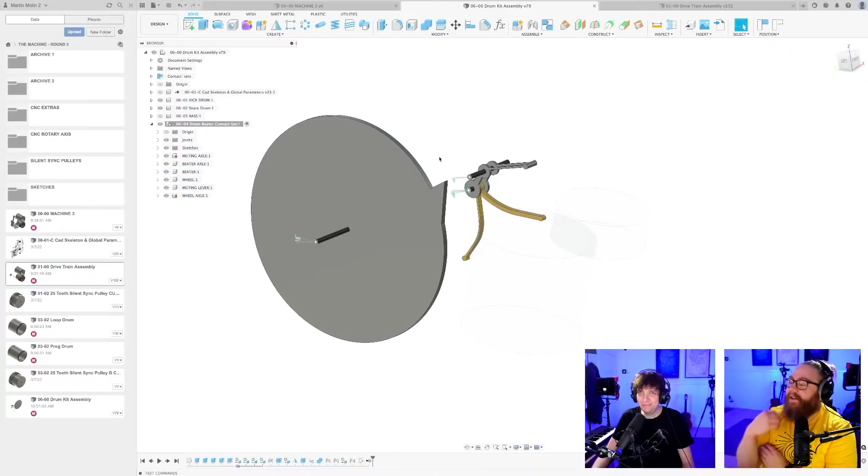Every day is like a dream here. Thank you for joining in, keeping us company. Today I have to teach myself something before I can move on.

So yesterday I started to figure out, basically the project right now is about getting a feeling of where we have space to put different things. One of the best breakthroughs we had yesterday is that I learned I can put this muting mechanism here on the crankshaft, because I thought the crankshaft would be in the way for this mechanism. Then I realized we can hide it in plain sight. We can use the thing that was in the way.

And then I started to make a motion link project here. I'm going to revert this position to show you, to calculate the muting mechanism of this movement. You can see how it reacts to the programming wheel here. But I quickly ran into the limits of my knowledge.

So I have to teach myself about motion links. I want to create a spring-like motion, and that's what I need to do first. I think it will be a useful tool for me during the rest of the design process. Like yesterday, I described it as physics simulation with low resolution. I think this could be very helpful.

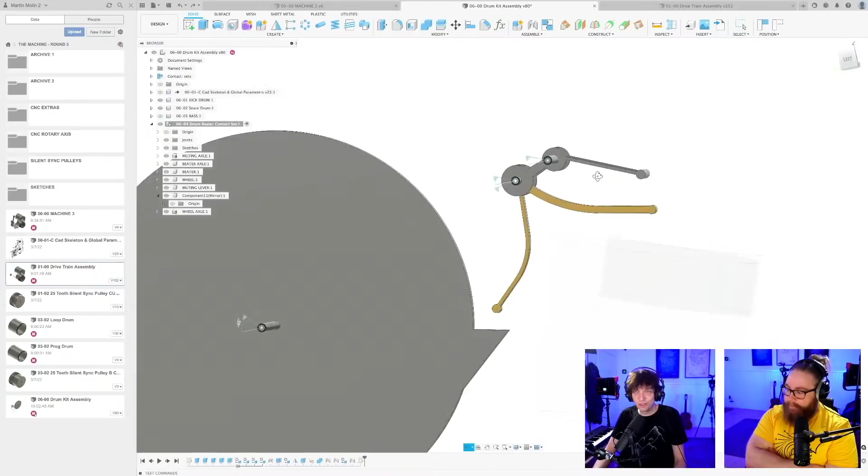So basically, sit back and relax while I'm painstakingly learning about slider joints, because this is what I've been researching. I need to make a spring-like movement, because once we do this thing here, I want the drum beater to return. So when the triangle skips here, it's going to be spring-loaded, and I want it to return like this. And then to complicate matters, this is the muting mechanism, and I want to see if I can also activate that. So that's on the agenda for today, and happy to have company while going on this adventure.

Well, you guys heard it. Fasten your seatbelts, it's gonna be a wild ride today. Here we go. Spring is coming. Honestly, this is going to be the motion.

Okay, so a little bit of backstory. On the second Marble machine we built, I forbid any link joints in Fusion 360, because at the time, the models we created had joints crashing the program all the time and messing everything up. So I forbid the joints, which means during all my years working with this program, I've never really learned the joint thing.

The joints seem to be working now, so I'm really behind in knowledge on this. So first thing I'm going to do is create a new component, and it's going to be some kind of sliding joint. I want to learn how this works.

So this is just to learn. Let's make a sketch on the middle of the drum plate.

Drum plane, I mean. And as usual, we have people coming in from all around the world. We even have Lee Bennett, aloha from Hawaii. Oh wow, and good morning from Kungsbacka. Nice, Australia, England, Carter Frost, greetings from New Mexico. Woo, 2 a.m., is the night squad out now? Fantastic, and here Rorschach gets what I'm talking about. Good morning, CAD watchers, let's get it on!

Yeah, it's funny because I feel not only a touch, but quite a lot of apprehension to learn about motion links. I don't know what it is, it's like some feeling I want things to stay where I put them. I don't want them to move around in CAD. Stay put, don't move.

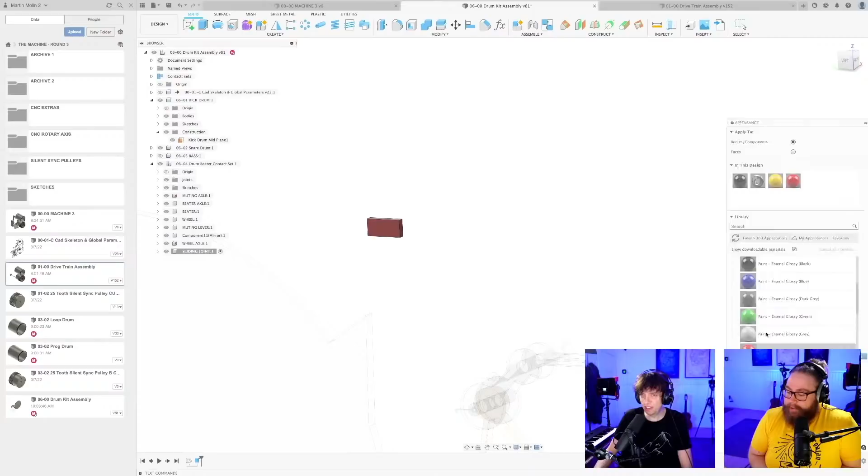So first of all, I need to make sure if... So I'm going to use paint to make things obvious. I'm gonna see if a sliding joint needs to be between two components. I guess so. Component 1 and component 2. Yeah okay, I can't even make the joint without a second component, so there we go. First lesson learned.

Already, so sliding joint still. This is gonna be the base of the spring that does not move. And then we are going to... I'm gonna copy this component, paste new. Or maybe let's just try to make a copy.

So as I said, I have no clue about how these joints are actually working. So now we have two components, they're a copy of each other. Let's try to make a sliding joint between these. This one. Oh, this is completely wrong. Motion link, can I make a motion link right away?

Is it an as-built joint then? So you see, I really have to take this from... So now I make an as-built joint between these two.

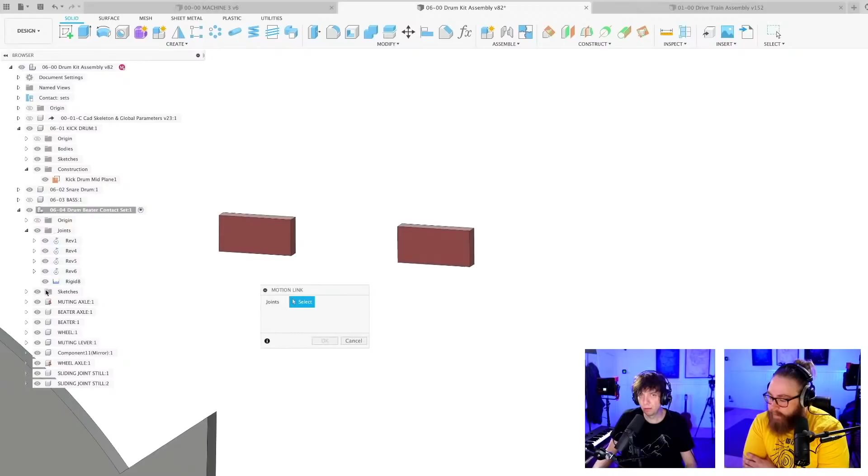Elliot is typing a lot of stuff here. So let's see, yes, motion is always between two components. And then the first one you select will be the moving component relative to the second one. Ah, nice, thank you. Is it Newsex? Thank you, Newsex.

Let me first of all not work with copies, because that can... Let me do what I thought first, paste a new component. So this is deleted, says here also. Quick tip, I find as-built joint works a lot better than regular joint command.

It lets you position everything in its default position with sketches and planes. Good idea.

Moving. So, this is already... let me change... So let me revert this position of this one, but let me do, I think, almost... This is the default position with the sketch.

Okay, this is better. Now we have green there and red there. So let me... I still don't think we can make a... Okay, I have to choose a joint.

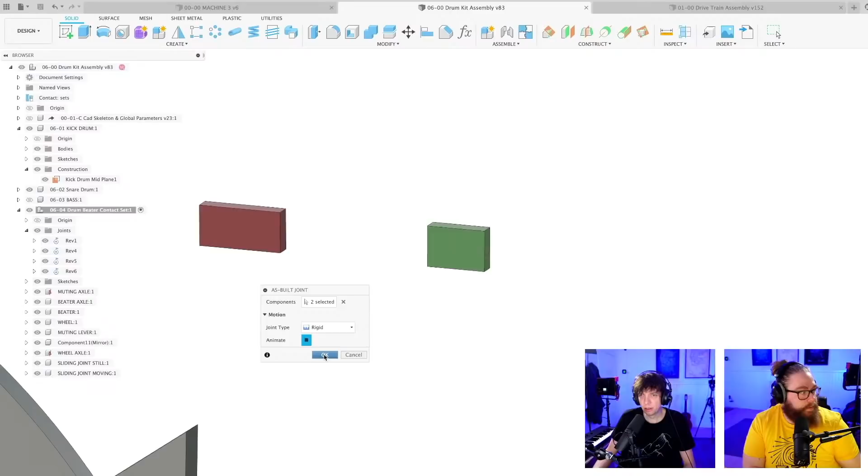Okay, so we have the as-built joint. Can we now edit this joint? Joint type: slider.

Okay, mode between two faces, simple, two edge intersection. Creates a joint origin. Creates a joint origin on a face. Okay, simple. Slider. And what's this?

Snap. Ah, select. Good. Here we go. Here we go, everybody. This was the missing link.

I have to do something like this. Ah, look at this. Oh wow. Yeah, we have movement, everyone.

You're animating pretty good on your own, Martin, huh? Maybe. So, and what I learned today is that

on this sliding joint, you have this little edit joint limits button here. Sneaky button. That it's a real sneaky one.

And I want to make a rest position, because I want it to return to the rest position. So let's just put something, 30.

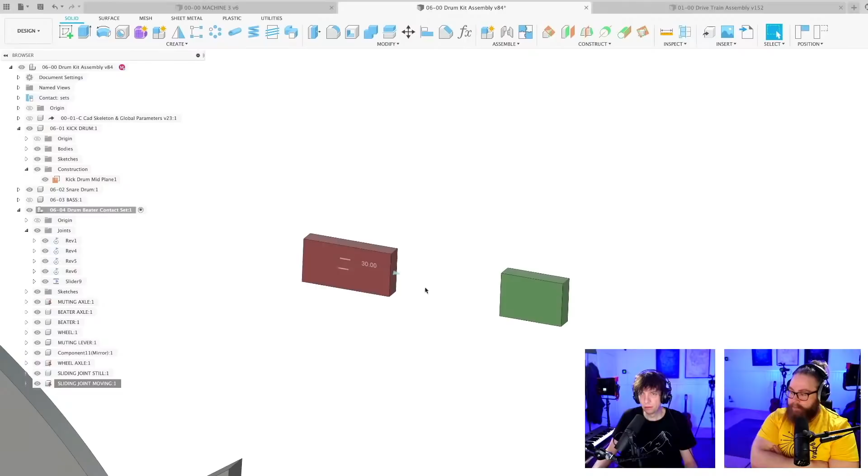Okay, good. Wow, look, wow. So I'm pushing this, it's almost like magnets. Woo! So this one I revert.

So now my idea is to use this red block as a kind of a spring to pull back this yellow beater.

Because it's going to revert. It's not a spring, it's just like a default position. Okay, progress. Progress, absolutely. A little bit of progress anyway.

You know what? Let's do this. Elliot keeps writing here: as-built means that the objects had to be in position where they already interact.

So if you want them to slide on each other touching, you have to move or create them in that position. If they're not touching or in a position where they should belong, then you shouldn't use as-built joints.

Okay, that's good information.

The master sketch. I think I have sketches turned off. No, I don't.

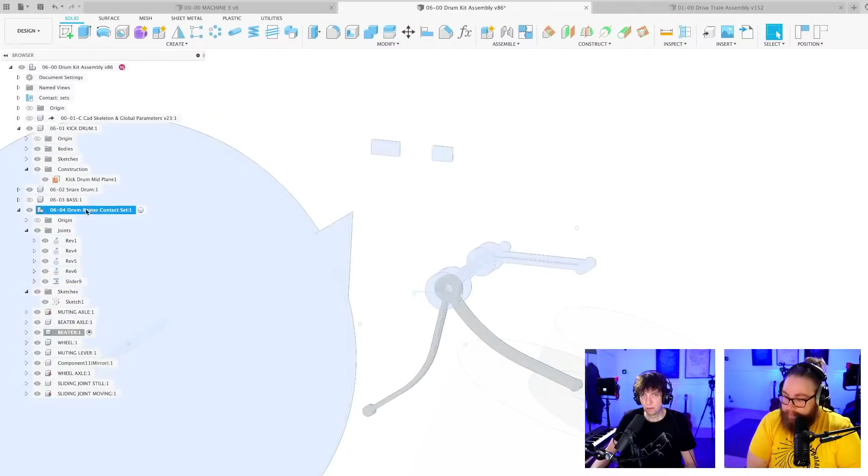Let me add. I'm gonna put a spring up here just for ease, like this. Finish sketch, and let me find the extrusion command of my yellow beater.

I was thinking actually this morning about prototyping things like this, and that we're going to learn physics simulation and everything. It's going to be fun, but it's going to be very limited.

And I think I realized that probably we could prototype with 3D printing at small scale. I think that's pretty interesting. So you can maybe just print this mechanism like 5 times smaller, and you would have actually a really good idea. I think that would be super fun.

That's kind of what Rosero taught me. Like 3D printing is fantastic for prototyping.

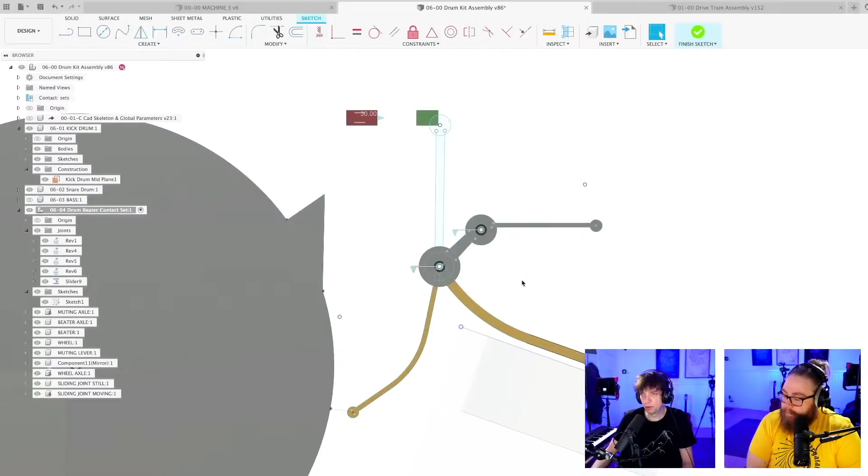Etalon3141: stupid question, I take it you cannot add a default position to the lever arm itself? Ooh, you're thinking maybe because this has a motion joint.

So maybe we can... let's look. I think we looked for it yesterday and didn't see it. Like a resting position to this joint. To the arm, no. But to the joint that is driving the arm.

Let's see in the browser tree if there is. What is this? Edit joint limits. Okay, oh wow, here we go.

Wow, Gretzky in the chat. Gretzky's, they're already here. They were here before we even started the stream. So that's how much they know where the puck is going.

Okay, and what's interesting is next time when we... okay, let's put a rest here.

Maybe it's already solved. So this is why I love streaming, because the Gretzkys in the chat are on the ball. On the puck, you mean?

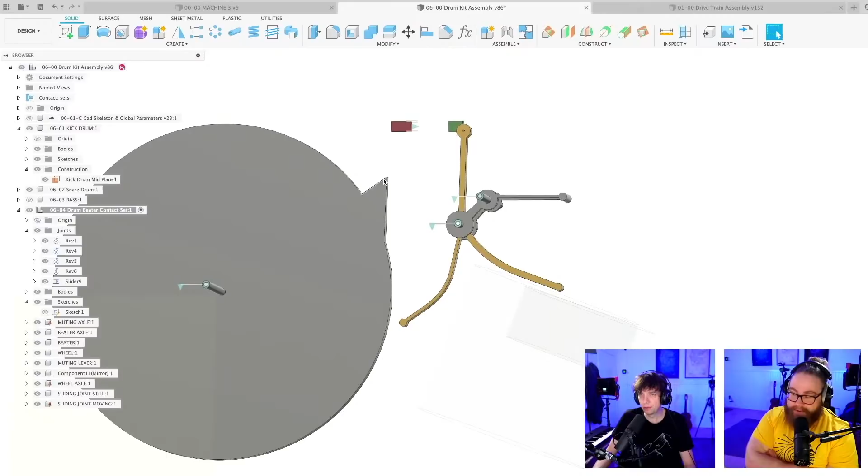Yeah, why can't I move this now? This died yesterday as well. Why does it do that?

Renan Kiritani: What would Rosero do? Cool way of thinking, haha.

So this joint broke yesterday again. It's super annoying. This is not the wheel. Sorry, I have to fix this.

First of all, let me just do -10.

Okay, children, close your eyes. Oh, they're closed. There's something else here. What is this? There's 2 bodies here. Okay, we have to find what is happening here.

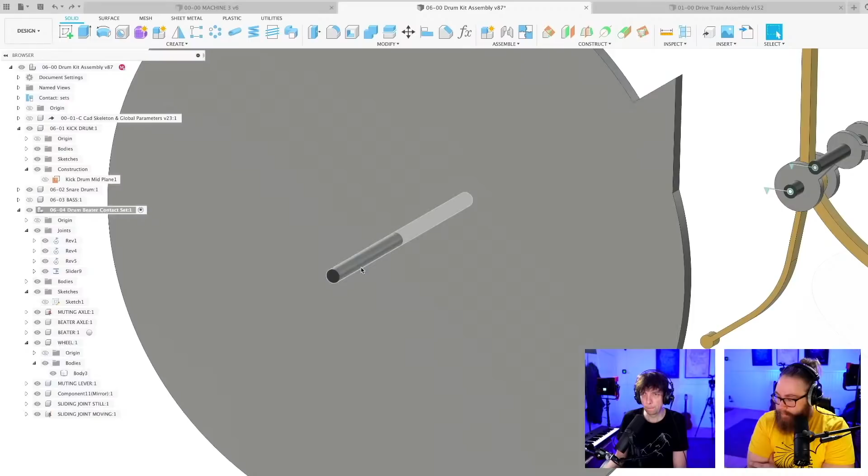Okay, something has been wrong with this little axle since the beginning. So let's roll back the timeline and see what is happening. So here's a body. That's good. And here's another body. All good so far. And then something is happening around here.

So let's name this wheel axle. I just have to make sure that all components are what I want them to be. Let's create a component from this body.

Oh wow, Samuel Westergren just joined in here. Hello from Marble Machine 1 photographer Samuel. Hallå Samuel, vad trevligt. Samuel took the best images.

Oh wait, I can show it actually. So Samuel, forever grateful to Samuel's amazing wepix.se, that's the website. He did all the promo photos and everything for the first Marble Machine in Gothenburg. Yeah, check this out, this photograph to the left here is Samuel's photograph. Brilliant man, I've been using that image almost as much as Solstickan cover art on the Swedish matches, which is the world's most replicated artwork.

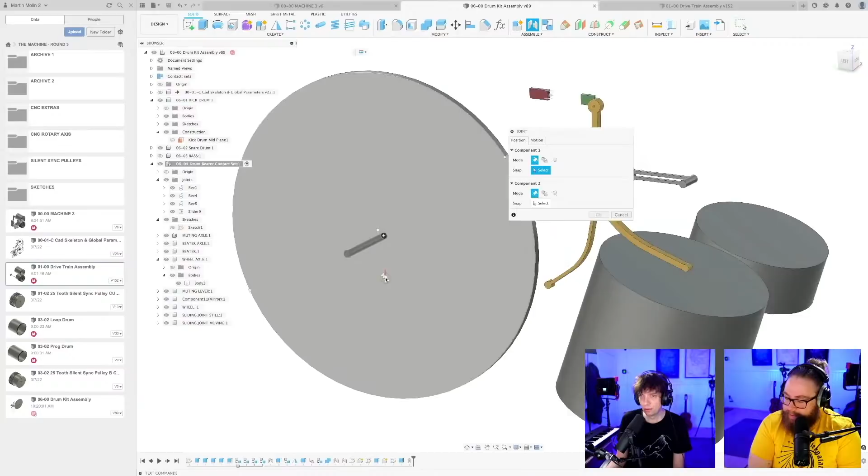That's what we're trying to do. Okay, so that's good. So let's now fix this joint between this thing and that thing. And I'm just going to slide it over into the middle. There, it's touching, and it's going to be a revolute joint. We see the animation, that's good. Oh yeah, and this thing should be grounded, just like Butters.

Thank you. Oh wow, thank you, Hannes. Wow, 3000, this early in the day. Yeah, wow, we have to compensate for me having to learn here. Okay, we're back.

Now we can see if the Gretzky in the chat. Okay, yeah, it's not part of the contact set yet. So let's just edit the contact set up here. That's the little thing that decides which components bump into each other. Edit this one. And as you can see, we have only 2 selected, and I have to select the wheel as well.

Now when I rotate the wheel, it will push the drumstick. And we have made a resting position. So let's see. Oh, yes. No, did not return.

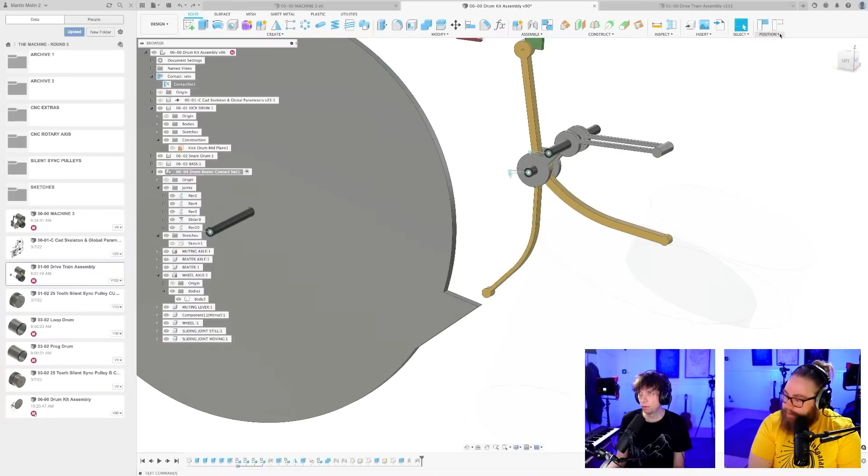So let's see what happened there. Oh, maybe we made a resting position on this. No. Revert.

Okay, so let's check again, because there's 2 joints here. It's between the gray and the black, and between the yellow and the black. So this one doesn't have a resting position now. Let's add one there.

And let's see now, it's 2 joints, so maybe we did it wrong. Oh! Whoa! Yeah! Whoa! Yahoo! No, there it's... what's happening now then? Almost, I celebrated too early. Sorry everyone, like a biker who lets go of his bike before.

Okay, what? What? When you release it, it snaps back. Ah. Okay. Well, that's success, I'll take it.

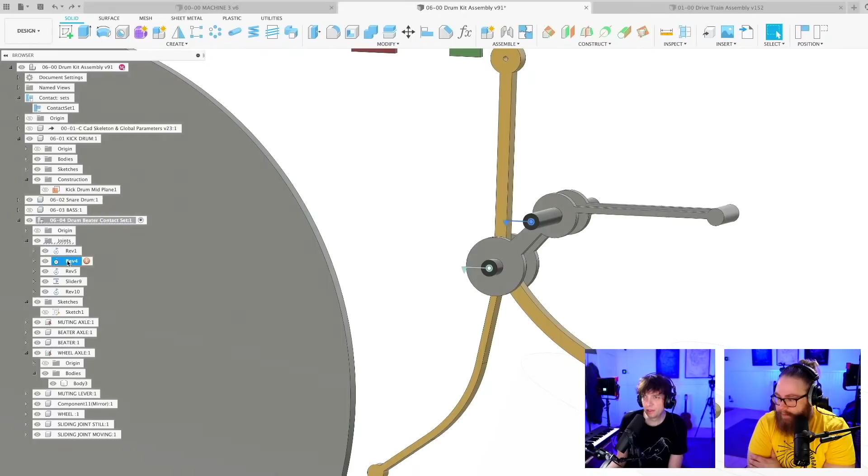Now I'm very curious. When we do this, okay, so I'm going to do the same thing on this joint. What was the name of the person who said there's a default position on the beater, Gretzky? Oh wow, I will scroll up and see if I can find it, who you are, I will find you. Edit joint limits, Italon 3141.

Yeah, thank you Italon for pointing out the correct route for me here. Look, now I have a resting position also on the muting. It snaps back.

But this, when we're doing this, can you see that the yellow thing is not angling? Yeah, and that's not how the function is supposed to work. Revert and save. Oh, we gotta save, everyone.

Can I get a cheers also? Oh yes, cheers Martin, cheers. Cheers everyone out there, cheers to chat. I'm trying to not drink in the microphone. Well.

So I'm gonna make a little stopper here that should push the yellow along. So let's go into this component.

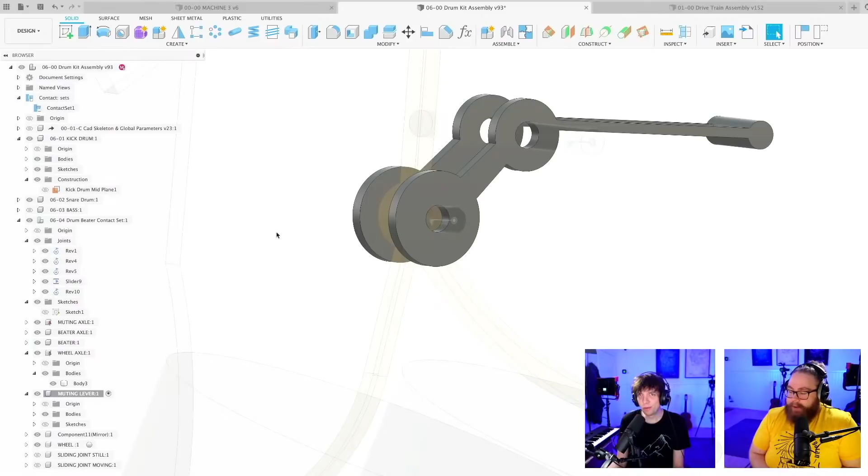So how are you, Samuel? Or if you're still here, let us know what's happening. Yes, give us updates, Samuel. Woo!

Italon says, makes me proud, thanks. Ah, that's nice.

Kooky Crumbs says cheers. That's our old friend Kooky, right? That's on Discord, another Avenger hero returning for the endgame. Yeah, he's here being a moderator. Actually, we've had wonderful moderators on all our streams so far, so we want to thank the moderator team a lot. So thanks Kooky for being part of the team. Cheer brilliance, our moderator team. Yep.

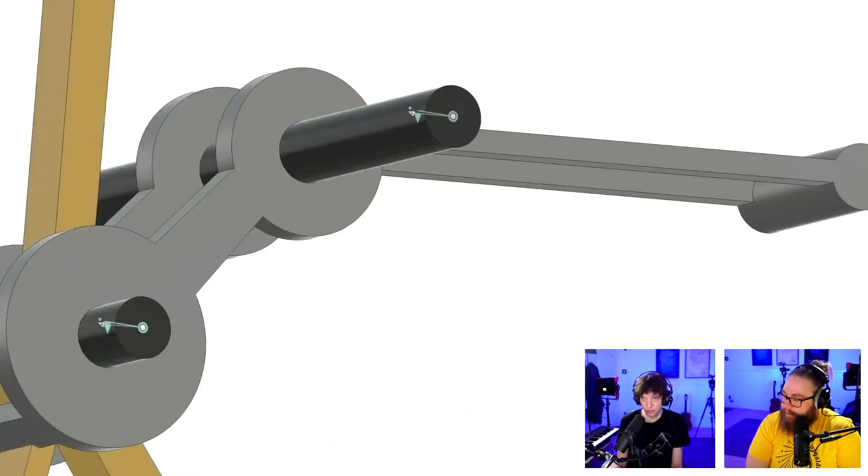So I'm doing a little stopper thing. And these are probably not part of the contact set. No, they're not. So what I mean is you can see this gray part sliding into the yellow body. You see how that cuts into the body? There? Yeah. Oh, I increased my zoom factor.

Oh, it's enhance, nice right? Enhance. So we have to tell our contact set to also include this and this. Oh, this was already included. So now when I rotate, the yellow should be angled. Okay, and now we're of course stuck forever then.

Well, to ease your pain, here's an update from Samuel Westergren. He says, I'm fine, will be a dad any day now. Whoa, congrats Samuel, congratulations. That sounds amazing. Yeah.

I know parents don't want advice, and you won't get anything from me because my own experience is with Wilson, and I don't know how applicable that is. But if you find similarities between Wilson, just give me a call. Yeah.

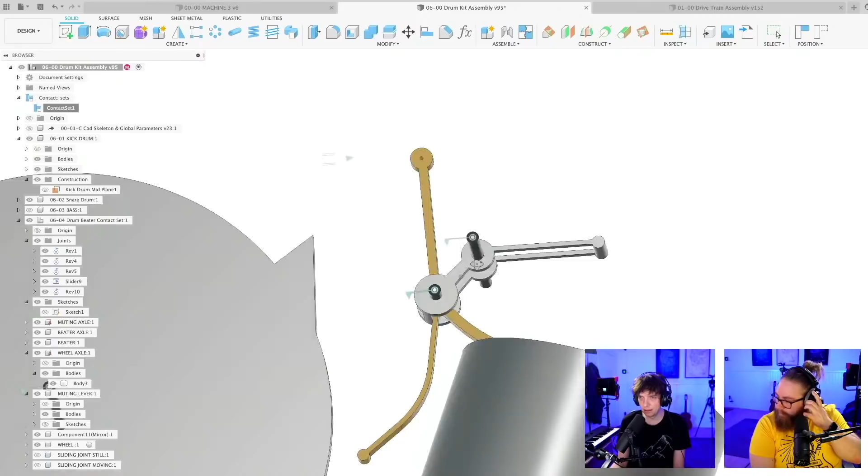Okay, we have some struggle here. It is working the way I want it to work, but in the beginning there's some kind of conflict here. So I have to exaggerate what I want it to do.

This is a little why I had apprehension for this project, because I'm suspecting that what I want Fusion to do might be impossible, but it also might just be because of what has happened here now. Why is this going straight through here? Have you moved anything? Revert position.

Wait, is this one grounded? No, that's not grounded. When I move, can we ground this one? This one is grounded. So when I move this upwards, I just want this to happen.

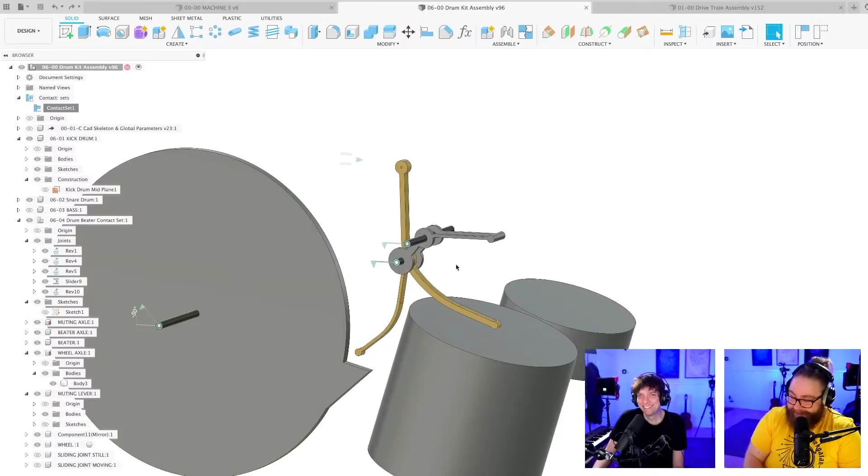Yes, I think Fusion gets confused when I have two shafts. Inuyasha says, Martin, it conflicts with the drum underneath. Yeah, but not here, the push lever will crash into the drum. Yeah, but here in the beginning, I only want a couple of degrees of movement.

Let me try to move it with a move command instead. I'm going to do movement like this, then Fusion knows exactly what I am trying to do. And see, it doesn't want to. And here all of a sudden it starts to accept it. Look. Yeah.

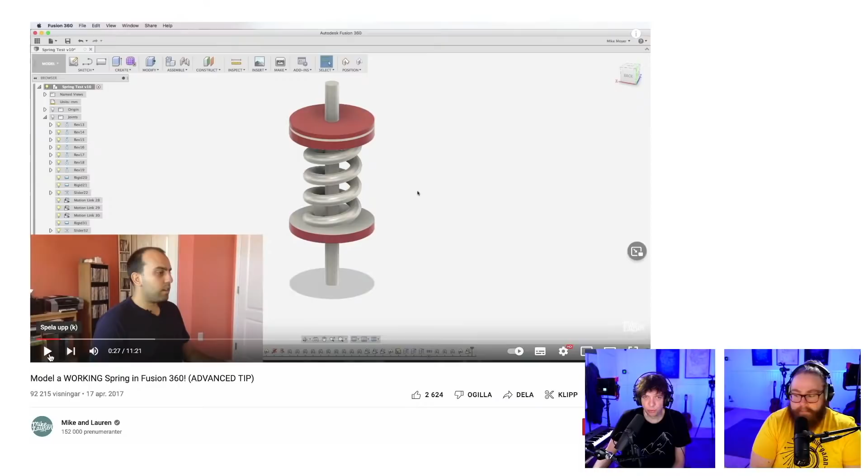Yeah, I wanted to show you something cool. When I was researching this, I found from Mike and Lauren, they modeled a working spring. Take this, on our screen you can see I've made this little spring that not only acts like a spring, but it also springs back on its own. And my reason for making this is I'm trying to... yeah, I just want to show you that, that's possible. Fusion doesn't have a feature like that.

And I also find John Hackney, this is for some reason off. There is John Hackney. Oh, John Hackney, he's helped us before. Yeah, I found John Hackney's tutorials very useful. Test a motion link instead of driving ratio. So that's also something I've been researching, and there's a lot of tutorials on this that has been great.

I have three different things from chat here, so let's see. Constant Zion: it's pushing against the wheel, but not against the notch. And then we have Graham Evans: check your motion limits. And Janik W: maybe you could add the kick drum to the contact set.

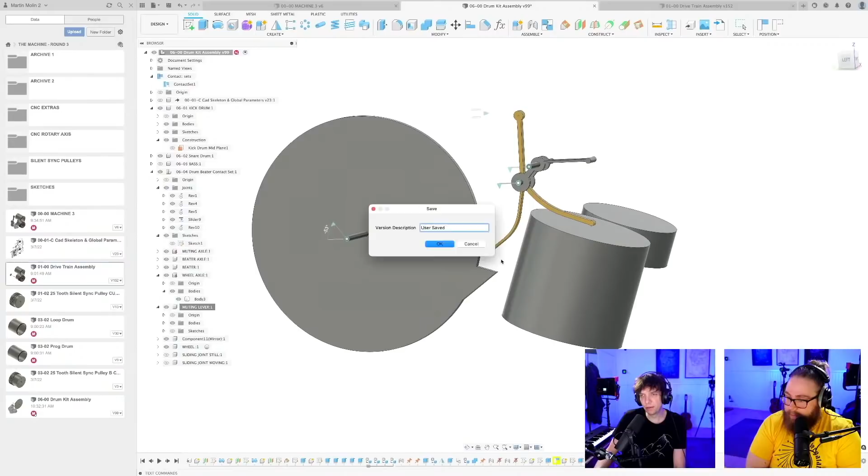Yeah, so my issue is starting before here. Oh wait, what I can do... I could actually do two... I can show one thing... Okay, now I have an idea. I can duplicate all this, and I can have one thing that shows this, and I can have the other one showing that. That's actually a pretty neat workaround. So let's just duplicate all these parts, except the axles, I guess.

Oh, it's only three parts. Dee, dee, dee, dee, dee. What's happening?

Here we go. Put them in front. And on this secondary thing, I can show the muting mechanism. That's actually everything I need to be able to design this, so I guess that will suffice.

Gyro Cabello, to me the problem seems more a lack of limiting the maximum degrees of freedom of the joint to avoid undesirable movements, isn't it?

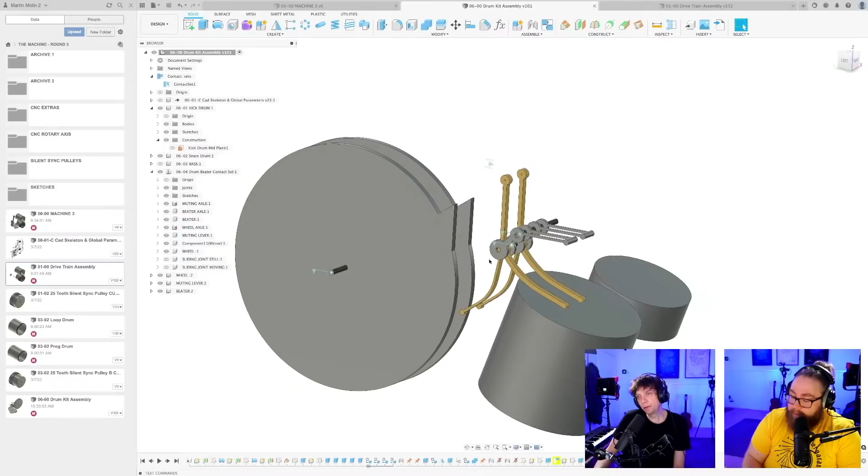Well, Fusion doesn't let me move it at all. So I think it is this stopper that I want free movement. Yeah, I'm not sure. I'm not sure. So let's now make a rigid joint or an as-built joint between this.

Wait. I think that with the current settings, the drum is still a ghost that doesn't influence anything. So now these two are moving in unison, which is what I want them to do.

But we're going to make another joint between this and the shaft. And it chooses revolute by default, which is good. And now it behaves the way I want it to. So you see the difference now is that the yellow thing is angling.

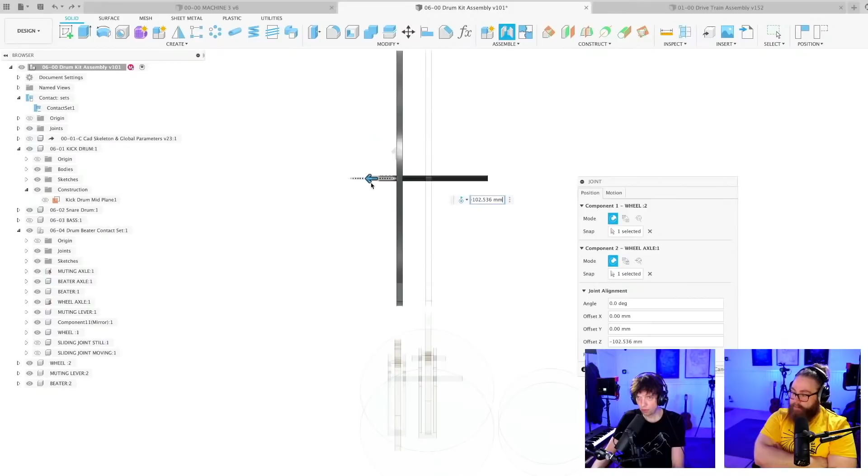It's following the motion. And the point of that is that when we put it like this, now the drum is... 1 second. This second wheel has to be jointed to the shaft. So as a tool for making the design, this workaround is good enough.

Oh, I should have set resting position on the muting. Revert position. So I think it's this joint. You can also name the joints. I should have done that.

So on this new joint, I'm going to set a resting position right here, which means that when I mute and let go, it snaps back. And then I realized that maybe I don't want that because I want to measure. Yeah, so I'm actually going to remove that.

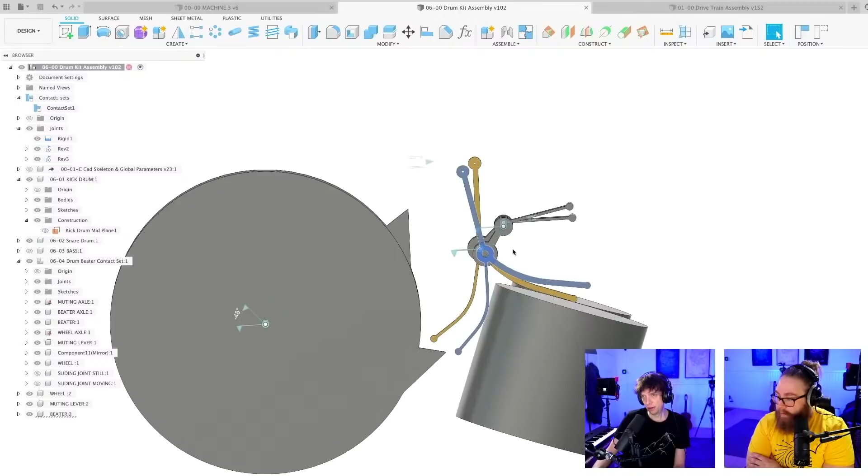And I am a little bit nervous about this space. You can see we're going into the kick drum here. That's not really optimal.

Revert position. Yeah, I'm actually happy because what I think, to put this in the same thing, I do not know if Fusion would accept that. So to explain the issue exactly what I want to do, maybe someone can replicate it. I want to be able to move this freely, but this should not be able to rotate backwards against this circle. So when I move this, this thing should always go forward like it does. But then if this still could pivot freely on this circle, that would be the whole thing.

But let's not cross the river to fetch water. Let's just keep on designing with this tool right here.

Hi, Martin and Hannes from Melbourne, Australia. I love the new CAD-only approach. The streams are so fun. So happy you have moved to version 3 and left the MMX behind, as great as it is. Thanks for the music. Oh, thank you so much.

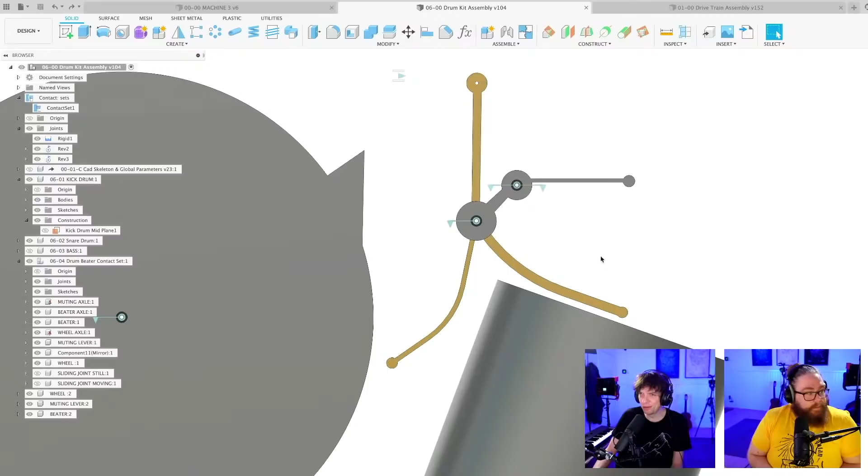I think the process for this project is 100 times better than anything we've done before. I totally agree with you. It's very nice to hear. And I hope to show everyone in the end, if we have like a functioning Marble Machine 3 in a year from now, people will like, oh, it was pretty smart moving to CAD only. That's really, the thirst for revenge is burning in my mouth. You can taste it.

To underscore this point that just was made from chat, we have some footage from the first building of the first machine. And yeah, you can kind of see how that process, it was suboptimal. You lose. Yeah, I prefer this type of work much better. Or as we also usually say, my machine will work. Speaking the truth. Okay, let's get down to it.

I'm worried about the space between this kick drum and this wheel. As you can see... Duker says, wouldn't a Revolute joint with limits do what you want? No, this is what we have. It is what we have.

Oh wait, it's actually... it's not what we have. Now I open my small ears. I used this. Okay.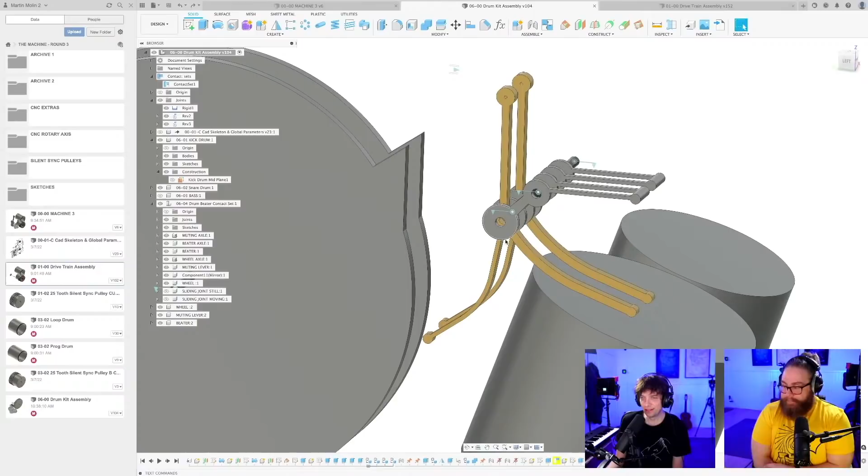Martin, you have to listen before you speak. Let's try. Oh yeah, it can. Okay, now we'll see. We have one more thing to try.

So I made this stop, but it's a physical stop, and that's maybe confusing Fusion. So let's delete this feature. So now we don't have that stop anymore. But it's not following.

So if we go to... I'm just going to check what we did with the spring here. We have a resting position there, yes. But if we go to this joint, now I'm with you. This might work, it also might not work.

Let's try. Minimum and maximum, of course. This is of course... maybe Fusion has thought about this. Who knows? So this is the minimum, and the maximum is 20.

Oh, I'm in the wrong joint. Let's cancel this. There are 2 joints here. Which one is the other one then?

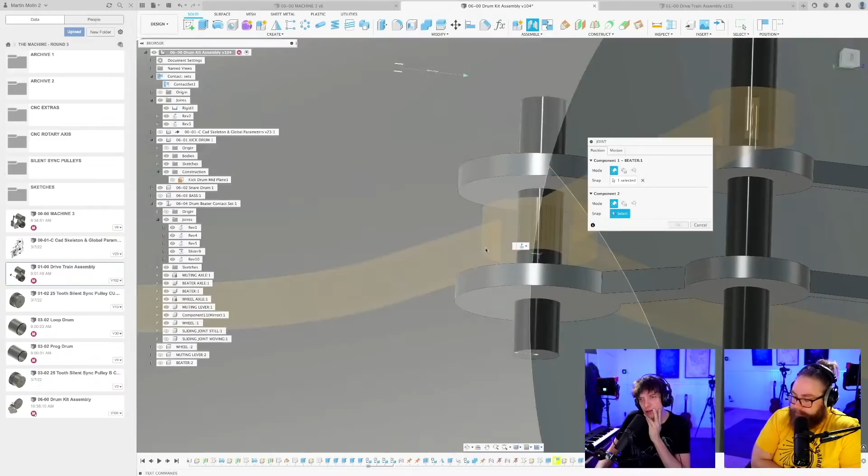The following assembly relationships already exist. Rev 1. Where is Rev 1 then? Is it this one? There's actually 2 flags here. Is this the one?

Let's just enter something here. Okay, here we go. And we have a minimum now. Okay.

No, the yellow thing is not rotating when I rotate this. It's just staying in its resting position. So it's not.

So maybe if we skip the rest, let's try. No, that's wrong. Let's try to skip the resting position

and see now. We can also animate. That's actually smart, let's animate this. Okay, so this is perfect. Now we have joint limits.

But it's not rotating when I do this handle. This contact set broken? Never mind for now.

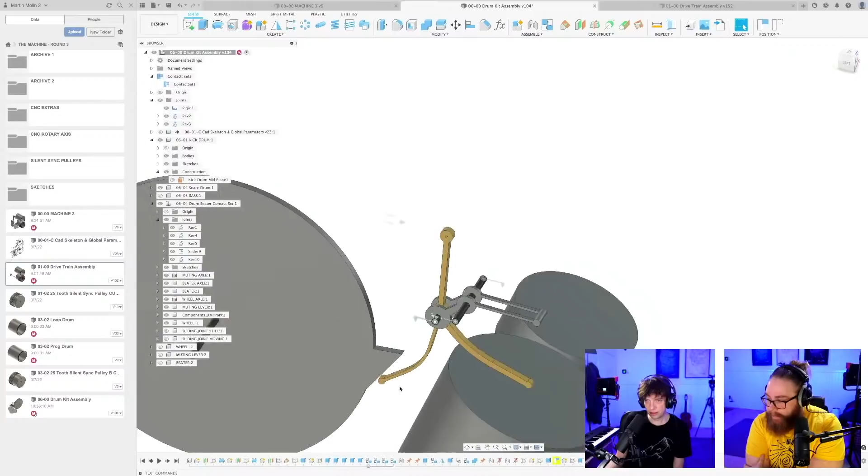So the question is how to tell the yellow thing that it should actually be rigid with you. And I thought my workaround with a stop there, with a positive stop.

Let's try that one more time now when we have the joint limits.

So I'm just going to project this and this. I'm just going to make a little thing here, like a little thing, a small thingy thing. Yeah, and then this works.

Okay wait, so this works better now when we don't have the rest. But where is the rest position on this? Okay, interesting. Let's now try the... maybe we're getting somewhere here. Maybe...

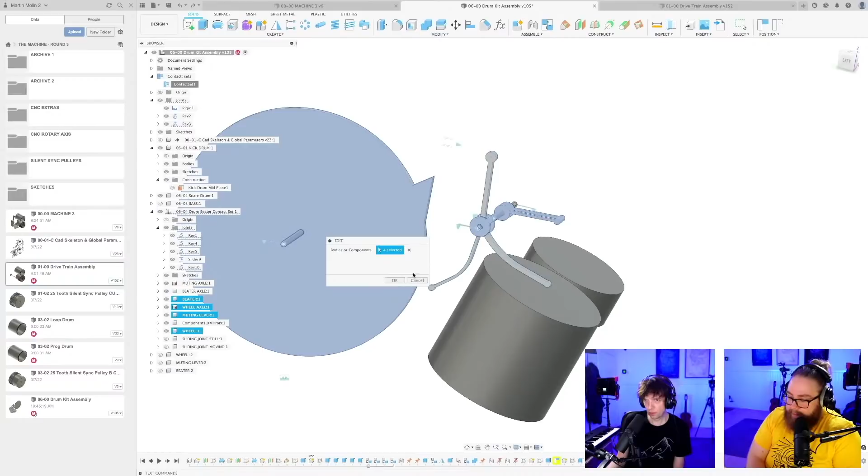Okay, a lot of tips from chat. Rob Brennan Craddock, let's see what he says. No, he removed it. This.

See, now it's not. Oh wait, of course not, because it's...

Okay, Jerome Verbong: the axle is rotating in both parts. That means the minimum and maximum angle will start to spin the axle inside the gray part.

Yeah, that's why I want to use this stop. And right now it's just going through because it's not part of the contact set. That's a good point, the minimum is spinning, and that's what I was hoping for. So this works now, now the stop is taking it.

Let's put a resting position on this one. Why isn't it actually already a resting position?

Linus Albertsson: maybe the mechanical stop confuses Fusion when you CAD it in contact. You mean it should be like a small little digital gap?

RST Trigger 003: create a joint between the yellow thing and the gray one directly, without including the shaft.

That's interesting. And Rob Brennan Craddock: isn't that behavior expected? You're telling the beater to rotate without friction around the lower pivot point, so that when you move the lever, the lack of friction prevents the beater moving.

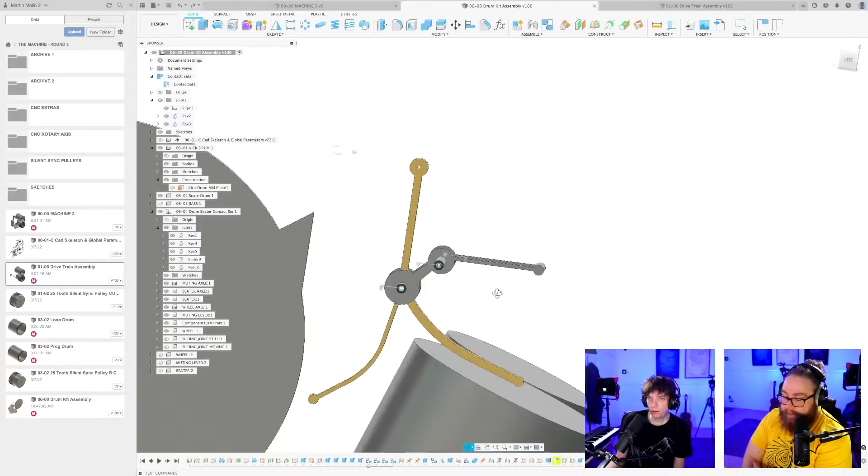Yeah, but we want to simulate. So what's not here is there's two springs connected to the cage. So this is a cage. Maybe sometimes I forget what I'm not explaining.

There's two springs. The yellow thing is connected to the gray thing with two springs on each side. And I should maybe mark them. But first of all, we're very close here, but this one is not returning. And I don't understand why. So I just want to find out why.

What's this joint? Edit joint. Between muting lever and muting axle. Okay, this is this joint.

So why edit joint limits? Why is the resting position not?

Rest 2 degrees, rest 0 degrees. Why is the resting position all of a sudden just not working anymore?

I'm going to delete this joint. Then this should be no. Okay, so that was another joint. So what's this joint then?

Confusion 360. Confusion 360.

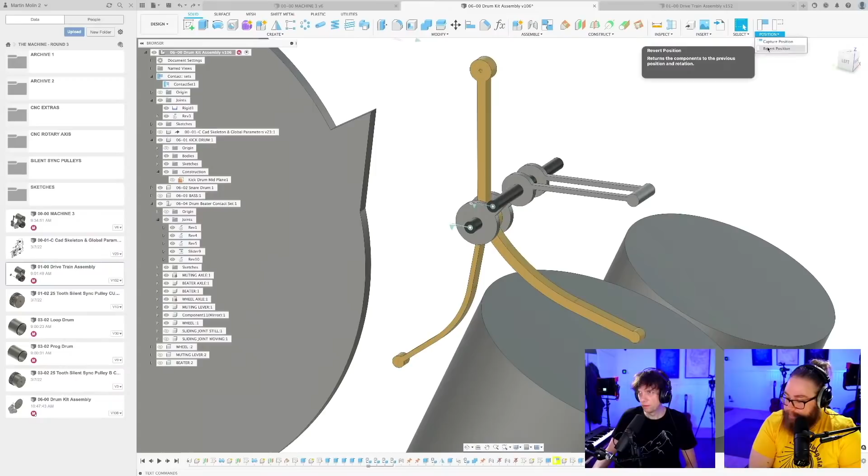Oh, is it because... Okay, so it's definitely this joint. And all of a sudden, it just ignores this. Why? That it takes that one.

Can the resting position of the beater be set relative to the muting lever instead of absolutely? Let me figure out why. I'm going to delete this joint as well. So now, the resting position... delete, and make a new joint between you and you.

Okay good, and I should also name my joints, because that's been a downfall so far. So this is my new beautiful joint. I'm going to call it muting lever to pivot. Never mind the spelling.

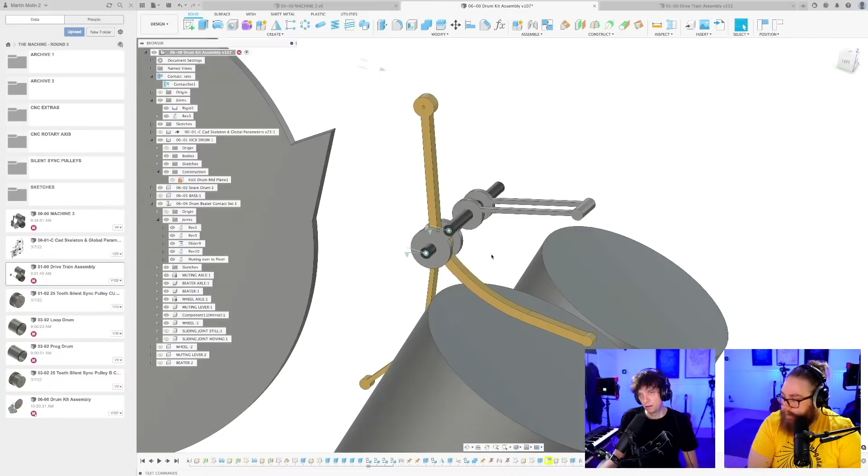And if we edit this joint's limits, we should be able to get it to move like this. Zero degrees, okay. I don't understand, it says some kind of override here.

Yeah, I don't think this is a productive rabbit hole. It feels like there's some kind of override happening. We're so close.

Why are things moving up here? What is this? I'm going to delete this sliding joint and delete these two components.

Graham Evans says conflicting resting positions, yeah something like that. RST trigger 003 - definitely you need two joints: one between the gray thing and the shaft, and the other between the gray and the yellow things. For the second one, you can set the resting position and limits.

Yeah, I need resting positions for both though. So let's delete all the joints, because it's a good idea to have it between the yellow and... I just want to create one joint with a resting position again that works.

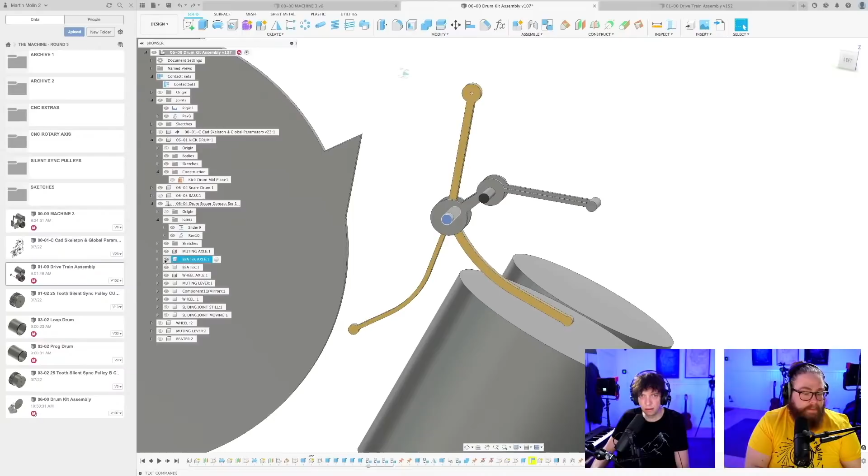So now there's no joints anywhere. You can see we can pull these things apart. Let's start from scratch. Maybe we should hide... you're pulling me apart, Lisa. So I remove that little axle.

Joint between you and you. So if nothing else, we will learn where joints are conflicting. Muting lever. Now I'm going to add a resting position to this joint.

Rest at zero degrees, okay. Now this should work. Okay good, look, now this resting position is working. That's what we want.

Now let's join the yellow thing to the gray thing. Perfect. Okay. And now we have the expected behavior that... oh, look at this, it's breaking the rest position. I haven't put a second rest position at all.

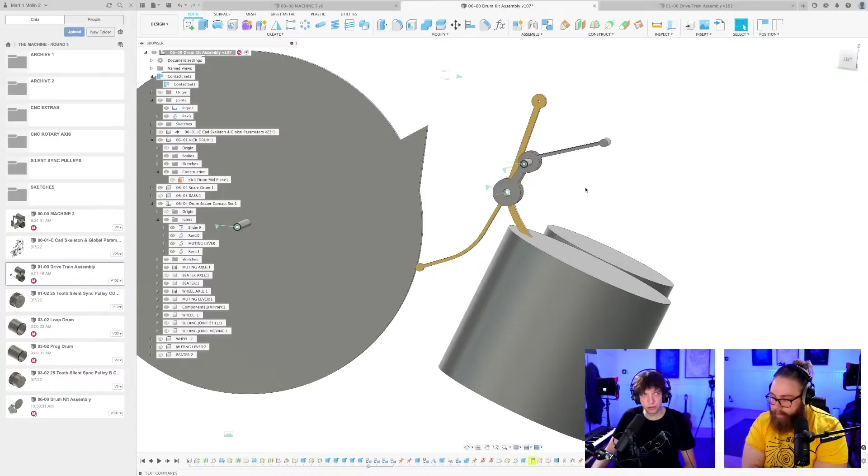Somewhere here I'm going to start to blame Fusion and not myself, actually. It's never your fault, it's always Fusion, you know. Because it just doesn't understand our brilliant ideas. Honestly, it doesn't understand me.

It sucks. Yeah, so this is the point where this is not a productive rabbit hole anymore, but it was super fun to learn more about it. To make design decisions, I don't need to bump up against inexplicable behavior of these resting positions. I'm not interested in going further with it right now, because we don't have to cross the bridge to get some water.

But it's annoying as hell. Well, I can tell. I'm suffering with all the people in chat who wanted to see this work, and definitely need to understand more about relationships - when you start a movement and you have several joints, how does Fusion prioritize this joint over the other?

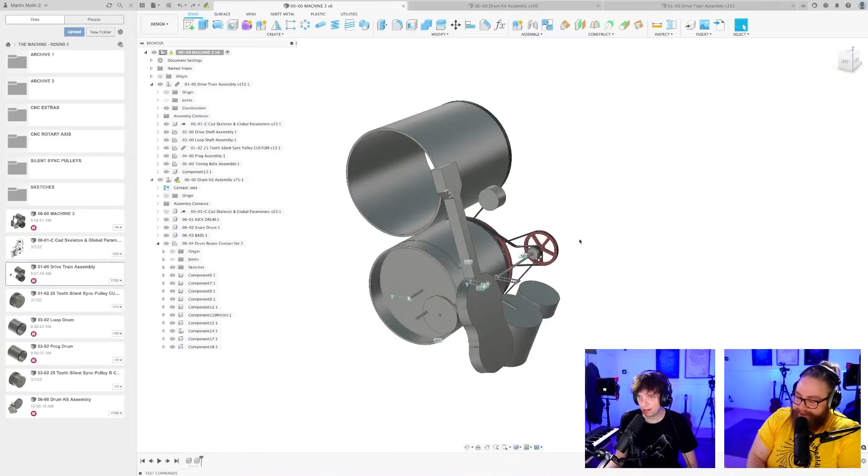So let's talk about design instead. Cookie Crumbs, going to leave that one to rest. Boom!

That's brilliant. Elliot says that's why it's breaking, and collisions don't really work as they are one-time events and Fusion doesn't work with those. And he wrote earlier there - the rest position of your wooden lever is relative to the muting lever, not to the programming drum, I guess. That's why it's breaking.

It hurts. So this is why my idea from the beginning was to use this sliding thing. Why are you moving? Why are you moving now? I'm going to ground you like butters.

So my idea, check this out - if we use this, I'm bullied back down into the rabbit hole by myself, I can't stop it now. My idea is if we use this to revert the yellow thing, just like a spring, then I can also show my design better.

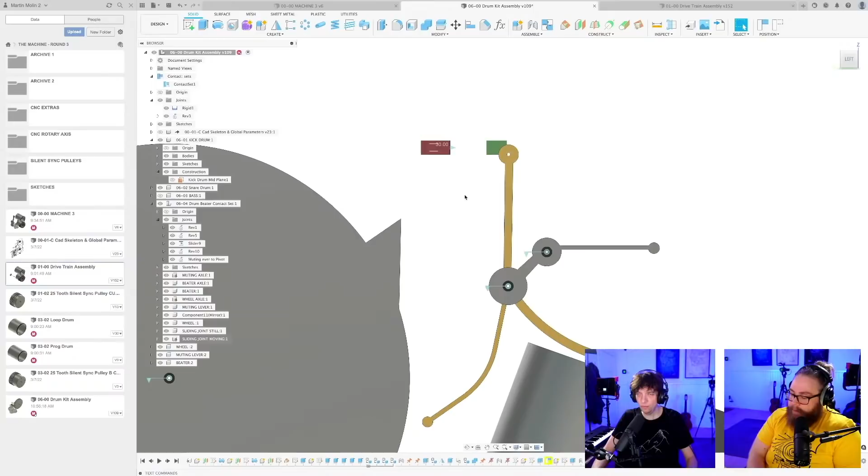And Elliot says here, one thing to keep in mind - if you're doing physics simulation afterwards, you do not need to put joints and motion links in Fusion, you'll do that in the sim software. Yeah, that's a good point. The reason I want to learn this now is to have this kind of lowest level simulation tool for designing, just to see how things kind of move.

Oh wow, rumors are spreading out here in chat now, Martin.

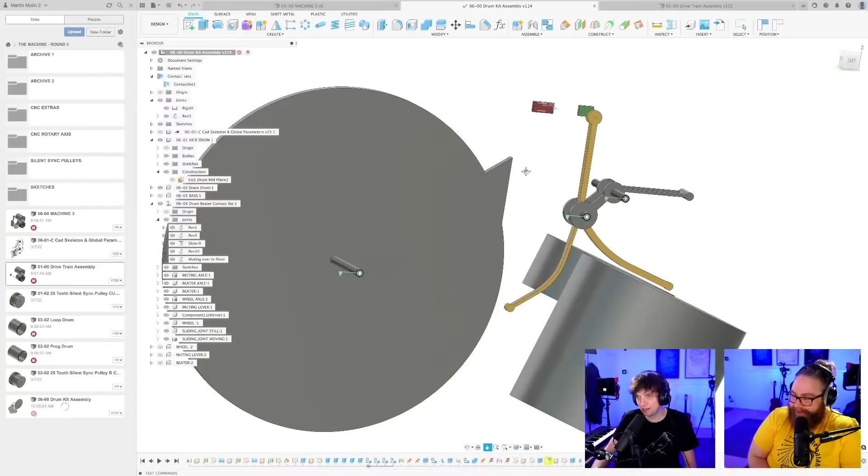So here's my thing. If we use this thing to revert the yellow thing, and if I rotate this thing with this thing, that's my little idea.

But I don't know if we should spend time on this. I do not know if we should spend time on this. I'm conflicted, as conflicted as the fusion joints.

It looked like you were getting into your rest position right there. You mean this?

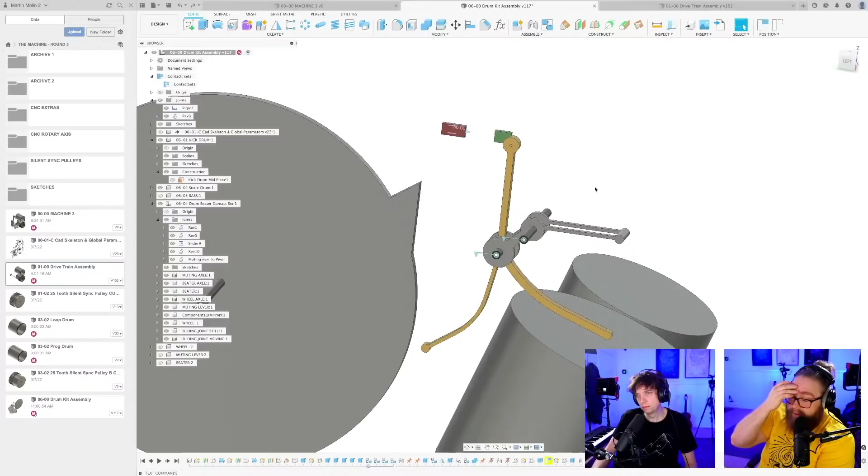Let's just see here. The muting part could be the separate part. That is putting the yellow's axle to the front and fixing it there. A spring will always try to put the yellow axle back.

The added value of me going a little bit deeper is that I can show everyone the mechanism I'm going for. So regardless if we can fix the movement, I think that in itself is worth it. So let's do that for that reason, if nothing else. That's actually a valid reason for digging a little bit deeper.

So what I'm cutting now is the two spring holders. Ugly, but that's okay.

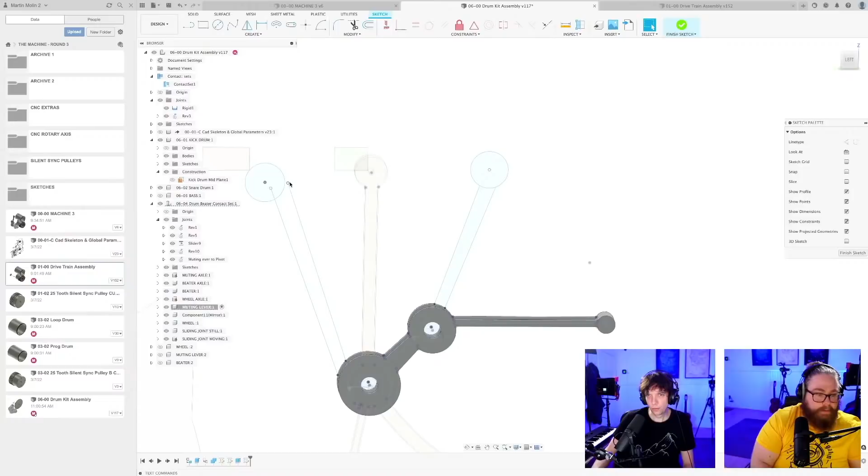Let's join this. Paul Wilkins, it's a good idea to leave it for now. Other people can explore this problem space and come back to you with solutions if they exist. Oh, that's a very, very good idea.

Then let me just finish this by making it clear how the springs will act. So here's our springs. Oh, I want it that way. I want it to go the other way. So let's see if I can do that.

Edit joint limits. Rest 600. Okay, nice.

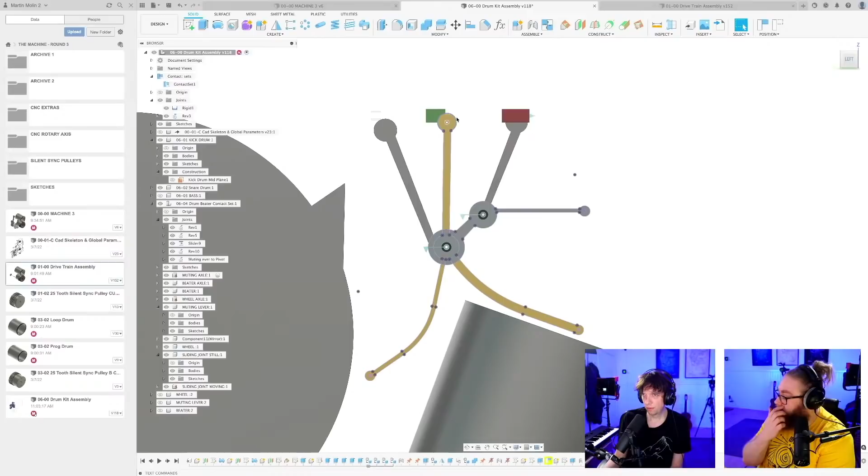So I'm gonna leave it here. For this to work, this would have to pull the yellow thing, but the red thing would also have to pivot with this.

So there has to be like a... Yeah, I'm leaving this now. I'm taking the shovel and filling up this rabbit hole right here. Good. Other people would... it would be great if you could figure it out. I hope...

You know what? Let's go to the iPad and I'll show you the design. Here we go. So if you want to CAD this, this is what it should be. So here's the programming thing, here's the registrator, and here's the pivot point of the muting thing.

I'm gonna make some better colors so it's easy to understand. So this is also from this. And then we have the spring holder here and a spring holder here, and then springs here. And if I fill the different parts so we can know what's what: yellow, yellow, yellow. Beautiful.

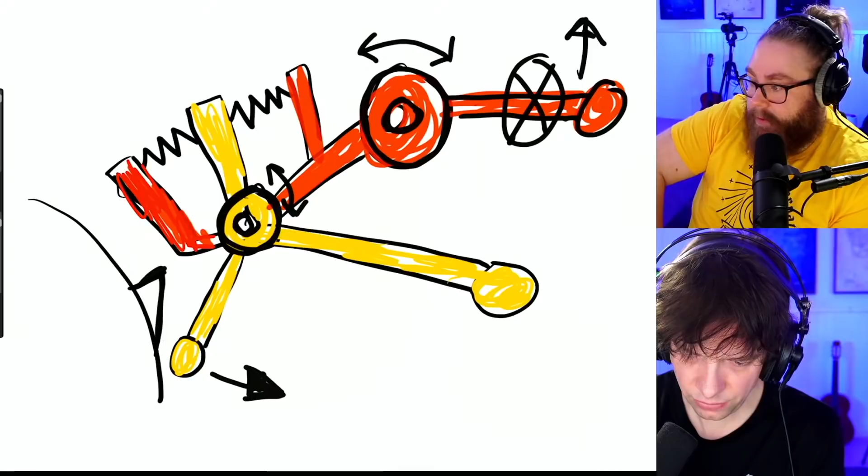This is moving like this, and this one is also moving like that, but the springs are obviously holding it. So when you secure this in place here, when you lock this position, the triangle will push this out this way. But when you unlock the position and you lift the muting lever, the thing as we showed will tilt this way, and then the triangle won't hit it. So the trick is to... this is the... so that should be...

So let me add just so if someone wants to dive into this: muting lever, beater, and then we have pivot 1, pivot 2, and then springs, extension springs, E springs.

And the range of movements, so these springs should be tunable here, so you can tune, and that's how you get the perfect action on the drum. So this will be a very big thing in the design later. So this is basically the design I want to make.

If you can make that work in Fusion 360, it's super interesting. But for now, let's move on. Let's keep trucking. Yeah, so you could see, did you feel my apprehension through that segment, Hannes? Oh no, oh no. Leave it.

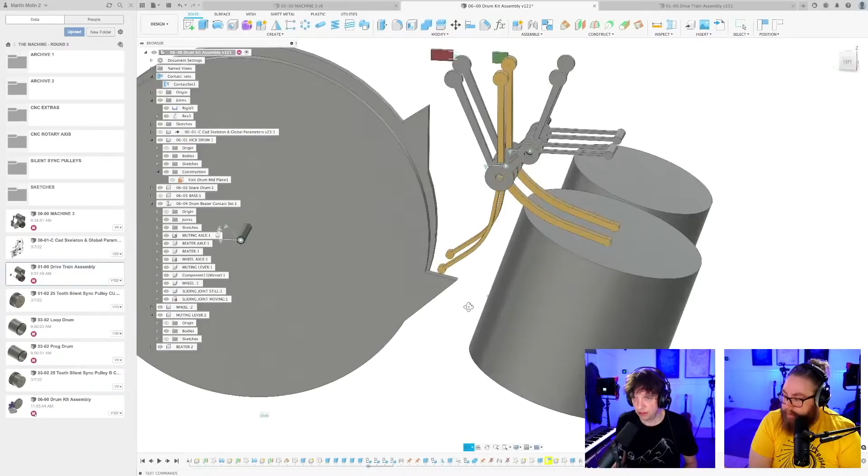I think the distance between this peak and the kick drum just isn't enough. So the question is, where do we find more space? Just make the whole machine wider? Yeah, even wider.

Didn't you mention moving that drum a bit back yesterday? Yeah, that's why it's so lovely to have the timing belts, because we're free to do things like that.

I think the machine is starting to get huge. It needs to be. And have we told people why we switched to belt? Not today, I think we should explain that in detail. Do you have a nice little image, perhaps?

One second. I have to update this design.

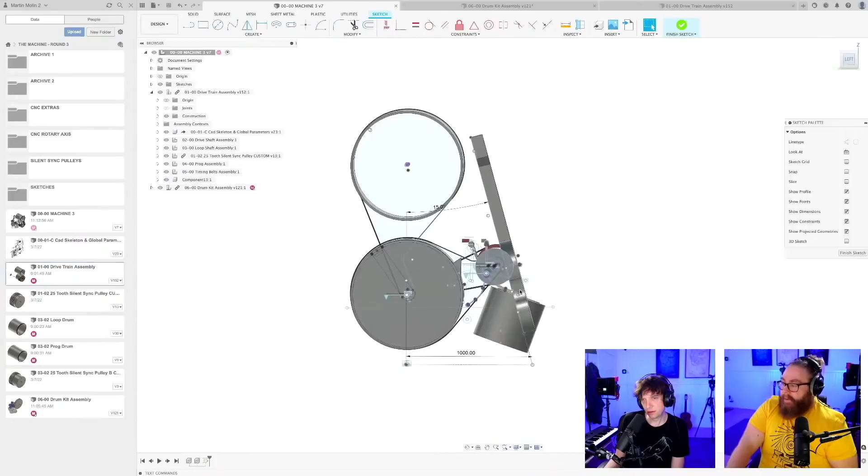Let's make a step file out of this.

This is classic in all my design journeys, that sometimes it feels like you're on a stair with very long steps, and you want to take the next step up, but the steps themselves are so long that you have to keep walking on that step to get to the next one. This is what I feel right now.

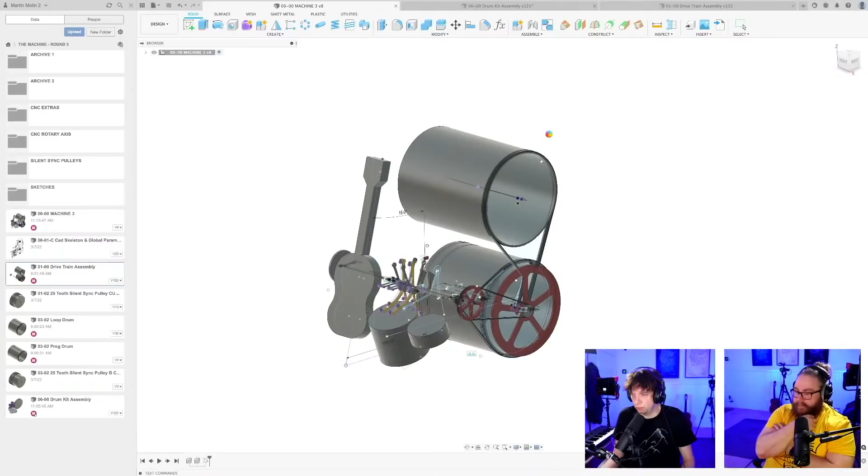I promised to do that already 2 days ago, so I'm happy to get it done. And that will give me some pause from this failed motion links attempt.

What's annoying me is that I don't know if Fusion failed or if it was me. Everyone can take a guess. 100% Fusion, we can all agree on that. 100%.

So maybe you want to show, while I'm uploading this, the ideas so far, Hannes? Oh yeah, I can do that, of course. Let me just prepare.

I'm also just going to double check that the step file is working. And now let's try this.

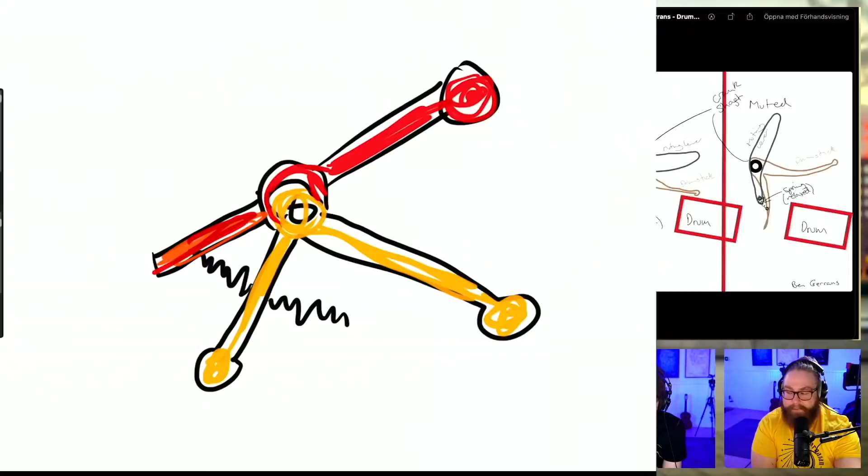Okay, so this spring, this is the question mark for me. Either this holder pivots with the red part, or it's stationary.

Hang on, this is exactly my previous idea, just using the same. What we have here is my exact idea, but using - because then this is very interesting. This spring will pull the yellow thing away, but we're using the same pivot point. And the springs will be resting at all times. It's basically just using the same pivot point, but the same idea.

But if we fix this to a stationary point, the green spring holder, we have something that behaves different. Okay, very good pointing out of this possibility.

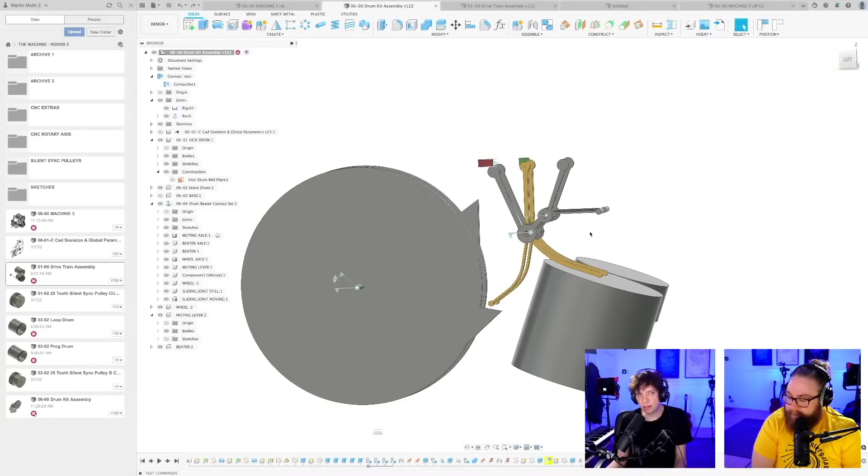And one good idea with having a separate pivot point for the muting mechanism is that a very tiny movement of a lever somewhere, a very small distance, gives a huge leverage so the registrator flies away - this little yellow thing flies away from the programming wheel very quickly.

Awesome suggestion, got me thinking. Good stuff, thank you. Okay, let's have a look at the next one. A little video here. Can we play it?

Muting lever red can remain stationary with the help of a bistable mechanism. Yes, that's the idea. And the beater blue will be activated by the rhythm wheel as intended. The spring will stretch and then return the beater to original. This is exactly the idea. When the muting lever is rotated counterclockwise, the beater will follow and the spring will remain at rest. That's exactly the idea.

One thing to keep in mind is that the bistable mechanism will have to keep the muting lever stationary with more force than the spring will produce when stretched to its full length. If it's not strong enough, the muting lever will get pulled along when the beater is activated by the rhythm wheel. So Dan, this is a great example of exactly my plan.

And if you guys want to get credited, please put your name inside the images. The only thing that you missed in this design is that the blue stick needs to go over its length. Right now the blue stick will bump up against the red little stop just below the spring, which means the blue stick will never reach the drum skin.

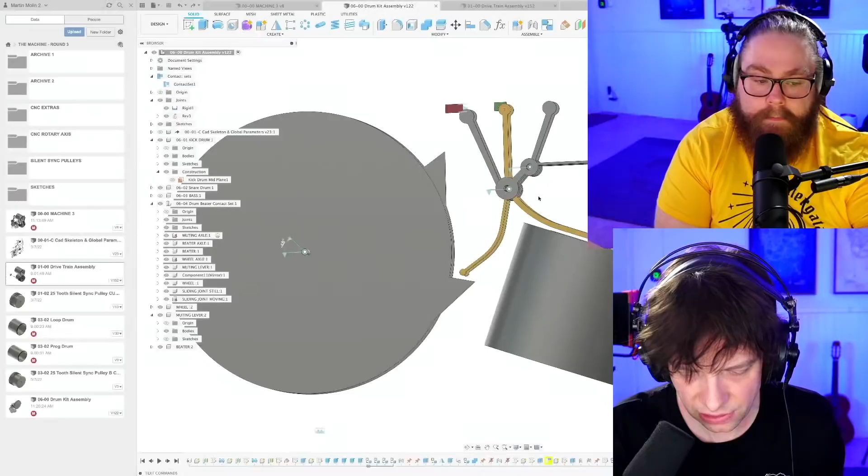Okay, let's look at the next one. Good stuff, people are sending good stuff. Okay, can you read the text?

Let's check this out right here. Pallet lift pockets - of course we probably want a case, and then it should be on the case. Pallet lift pocket on the machine itself. Boom. Question mark - cool idea, thank you for that one.

Okay, Juan Carbajo. Wow, look at this. Looks like a robot, a gizmo quack.

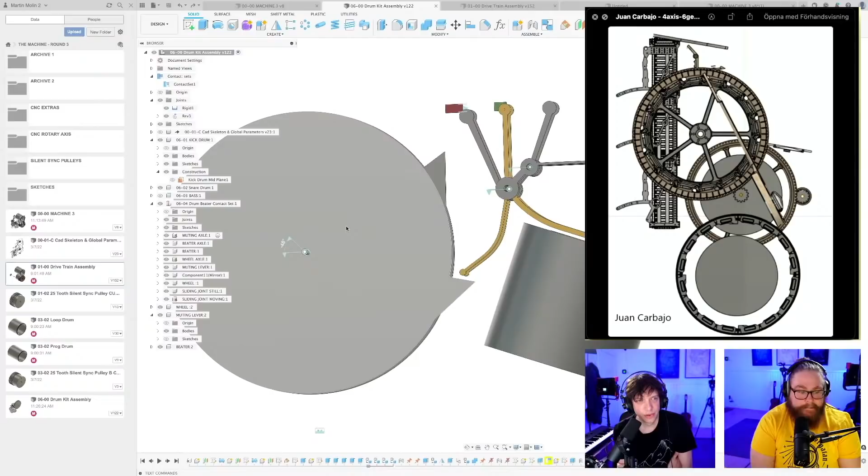Yeah, so here the below wheel is not powered, but this is cool. And this is the reverted, yeah. This is because we've reverted the direction of the programming wheel. Cool.

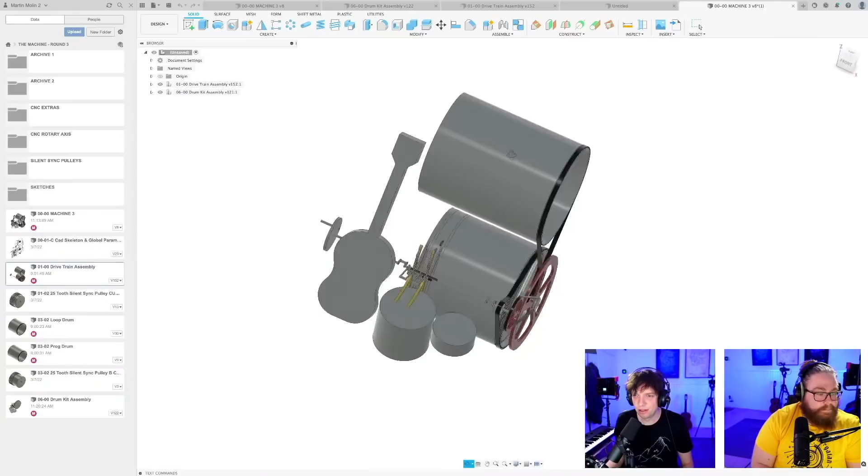So let me go and think about this. What I will do is that I'm going to look at this in a new...

I'm thinking also how to reach this with a lever. I'm thinking a Bowden cable could be something - a Bowden cable lever that's like, they come like off the shelf.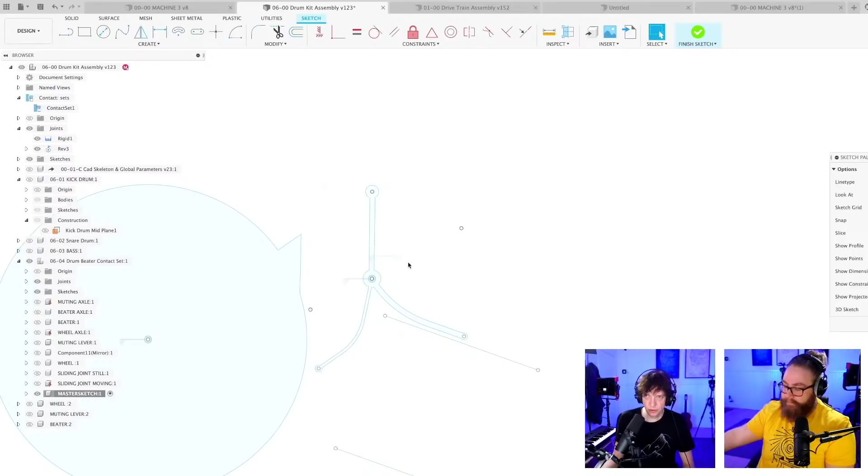So my point is that if I make a pivot point far away here, and I lock this position, and I make a long lever arm like this, down to here, which is the registrator, and I tell these blue lines that they are collinear, I can rotate this, and a very small movement up here makes a huge movement down there. You can see how this ball down here is dancing around.

So depending on how the muting is working, we can clear this triangle with a much smaller mechanical movement if we're free with this pivot point. So if I do the same design on this one, I'm gonna lock this - the travel must be much longer to clear the programming pins.

But it might not be an issue. And just go where the puck is gonna be, Martin.

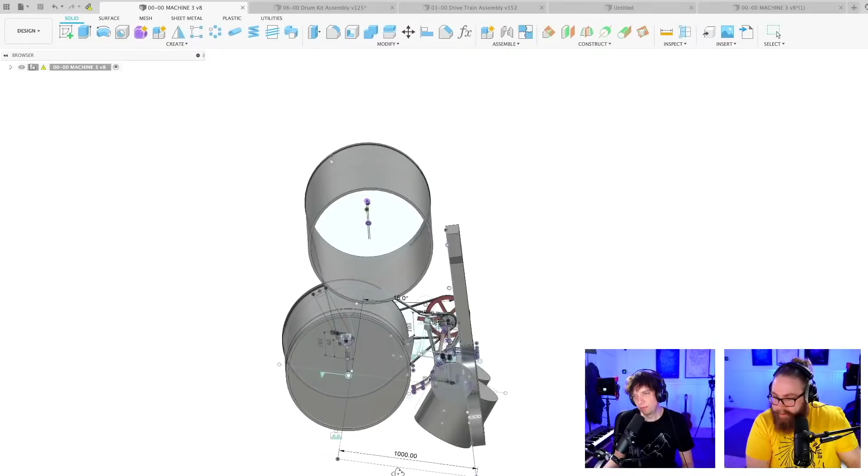Yeah, there's... oh wait. We could have a smaller kick drum, perhaps. Maybe we shouldn't have, like, the...

The alternatives are to move the things further apart, because we're almost there. Just 5 centimeters might be enough, that's all we need. Okay, how long is a drumstick?

Regular drumstick? Yeah, chat, you know what to do. The length of a regular drumstick would be very interesting.

15 to 17.5 inches, from Paul Wilkins. Fantastic, thank you. So that would be from here to here.

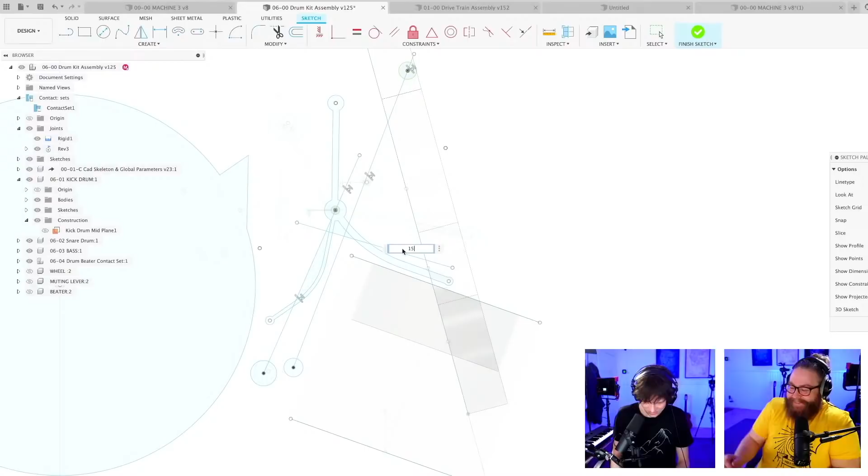15 inches translates to 38.1 centimeters. This looks pretty good.

I would sleep better at night if... You mean you would find your rest position easier come night if the drums and the wheel were further apart. I would just like to blow this design issue wide open, with the ideas of...

So let's do that. I've been apprehensive around doing that from the beginning because I don't want the footprint of the machine to be too crazy. But maybe it's too late for that.

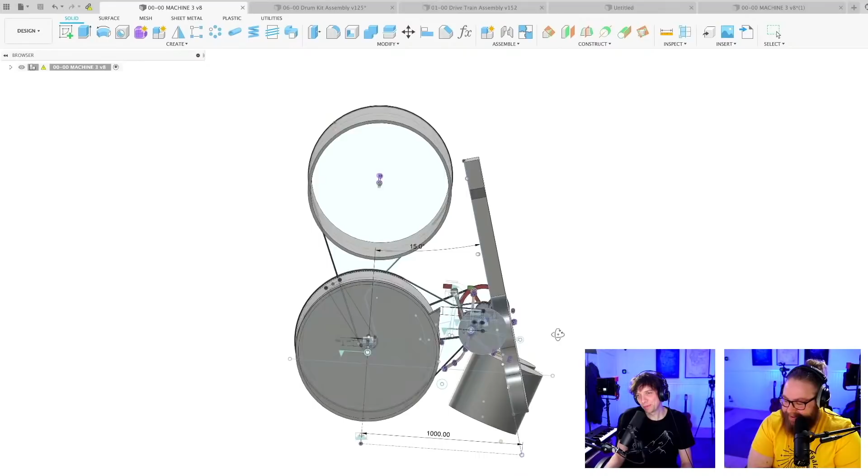Oh, we passed crazy, Martin. We passed it long time ago. Did we? Did we now? Okay, so let's open the...

This is the design that is governing everything else. I'm going to clean this up. Now we're here, all the blue stuff has to go because that is not what we're here for. So let me just clear this out.

Yeah, but I'm too naive, Hannes. We can't have a 2 meter wide machine, this is what bugs me right now. Either I have to kill my darling of having the same sized programming wheel, like this loop wheel. Why does it need to be that big?

Because I wanted it to be the same stock as the top one, and gear-wise it would be easier, it's just the same tooth count. It would be...

Oh wait, we actually have a... let's check, we have a pulley from the silent sync pulley system from the factory. So let's look at the largest off-the-shelf pulley there is.

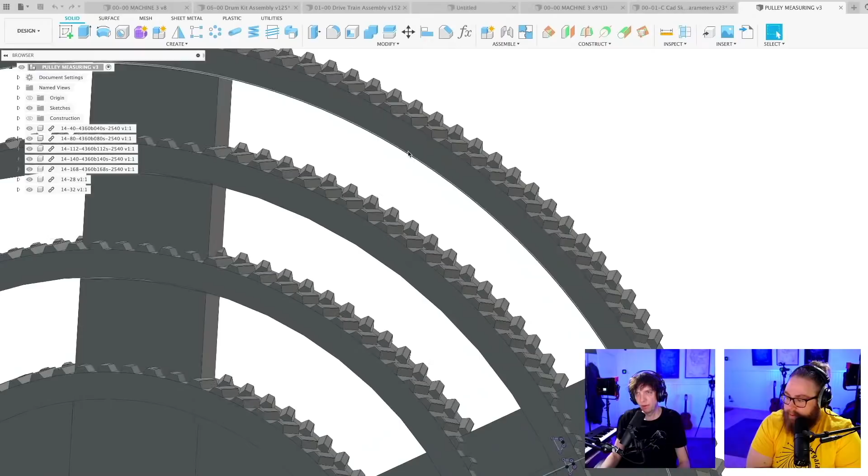So this is 737. If we went down to 800, this has 168 teeth. 168 divided by 8, do you know what that is? I can calculate it: 168 divided by 8 is 21.

So then we will go from a 20. This is possible, so we could win 5 centimeters on both ends by reducing the size of the loop machine to 800 millimeter instead of 900. Let's have a look at that.

It hurts, sometimes that's good. 700... killing your darlings is never easy. No wait, I'm saying 800. No, it's not, but we're here. Either I learn to kill my darlings, or I give up on the project.

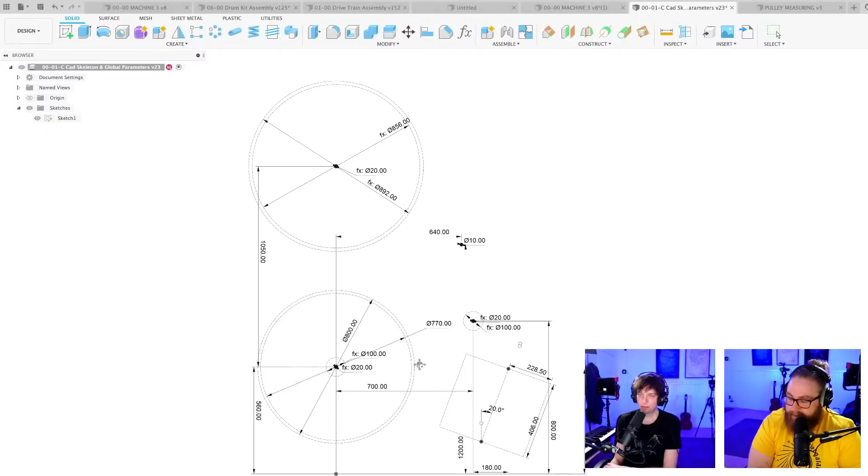Yeah, look at all that space here. Oh, infinite space. It's almost nicer looking, isn't it? Yeah, with a little smaller drum loop. It's still, the timing is still going to be awesome. And I think it gives us the wiggle room we would need without increasing the footprint of the machine.

So let's measure now, including the marble catching thing, or maybe the marble catching net thing. And also, as Wujumon says, can't you push the loop drum back? Yeah, so yes, but that increases the footprint here.

What if, check this out, Hannes, Paradis. I'm thinking a little bit about transportation, and about doors. All my marble machines have been stuck into rooms because the doors were not big enough. So I'm thinking, if the machine is 2 meters in all directions...

What if the marble catching system has some removable components, easily removable for transportation? And maybe this drum is even removable if needed, which means that this right line here is the front footprint during transportation.

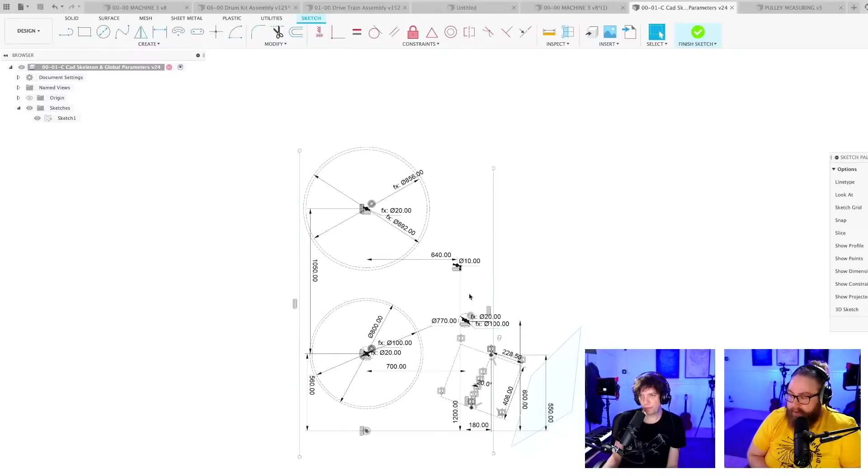The hubless design that was suggested yesterday, I think it's too difficult to pull off with precision, and it's too noisy. And most of all, I want the kick drum and the snare drum next to each other. But I love the suggestion.

I'm gonna move the loop. I'm not gonna make the loop machine smaller, I'm gonna move it back. And because I also want this leaning frame like this, and maybe 2 wheels. If the lower wheel is further back, that might be something.

So let's remove all this clutter, because I saw the machine was not so wide. I have to check why this is constrained. I think it's constrained under. I have to find this constraint.

Enhance. Vertical constraint. I want to remove that. Okay, that was it. And we're moving this. Woohoo!

Yes, now we're talking. It actually creates a kind of a nice something. You can quote us on that, people.

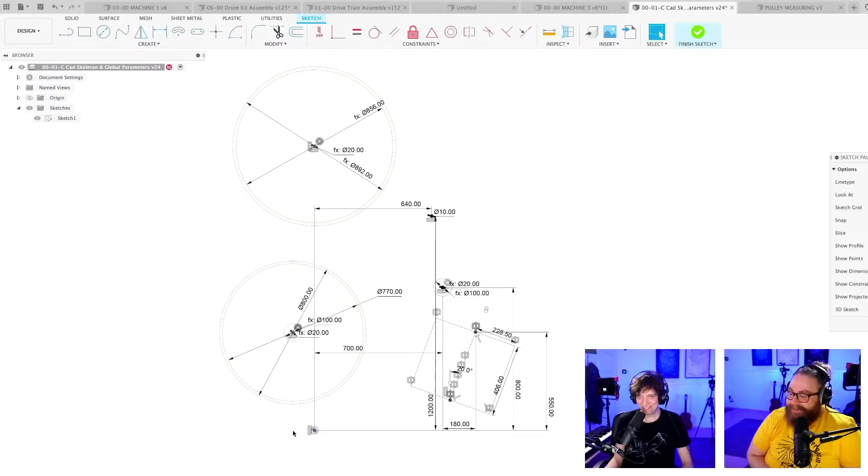Let's add a new constraint like this. So I think we need 10 centimeters or something. Let's add 12. Boom. And then I'm just going to say your relationship is... boom. This is still... yes.

I just have to set the height. During previous streams we've been making this model very parametric, so everything I do now should propagate into our latest model. But look at that. It's majestic, Hannes Knutsson. Majestic, regal, royal. And now it's still too small, so let's go back on the...

I'm going to use this function, D11. D11, boom. The inside is D18.

This might also be good for the resonator pipes and stuff for the vibraphone. Yeah, yeah.

We can see Fusion is struggling with this, probably. Fusion is absolutely struggling with this. It's crashed. Oh! No!

Well, what can you do? Now I get all red because my screen is red. With digital makeup, the error light.

People seem excited now that we're starting to move around stuff in the design. It's good, good exercising for all of us. This is exactly what we're doing now in this part of the process, finding the big positions. So I'm happy for that, that's good progress.

And we're back. Nope, we're not. There we are, there we are. So I kind of pushed Fusion. I should go into the designs themselves and update them. It's better. So let's open this one and see what was... This was actually saved. Good.

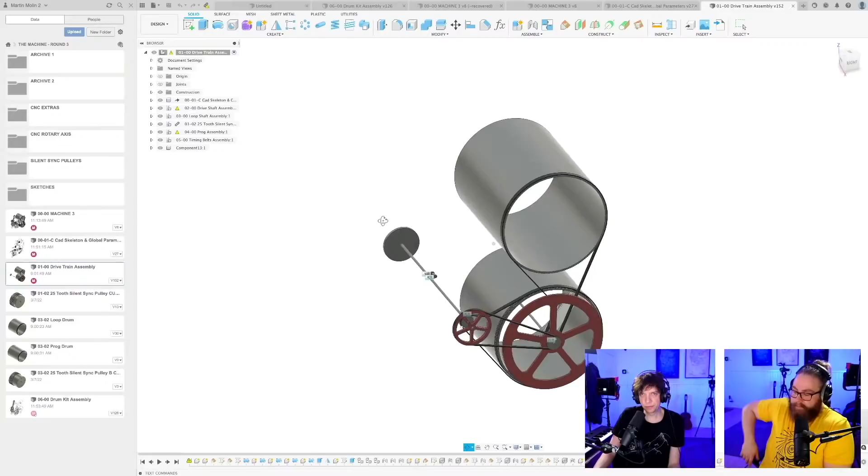Let's go first to the drivetrain assembly. I'll open that file separately. I'm going to try to go to the bottom and update a little bit from the bottom. This is a graphic issue with Fusion.

Fusion, why are you not playing along today? No, it's me. It's probably me. It's never you, Martin. It's not you, it's me.

Fusion is not crashing, but it's okay. Now here we go. Nice. Okay, so this is good here, and now my browser window is gone. This is wonderful. Thank you, Fusion.

So you can see this is a display bug. So when I choose another component, it goes here. Nice, looks perfectly fine. And often when you choose another component long enough, it will just work.